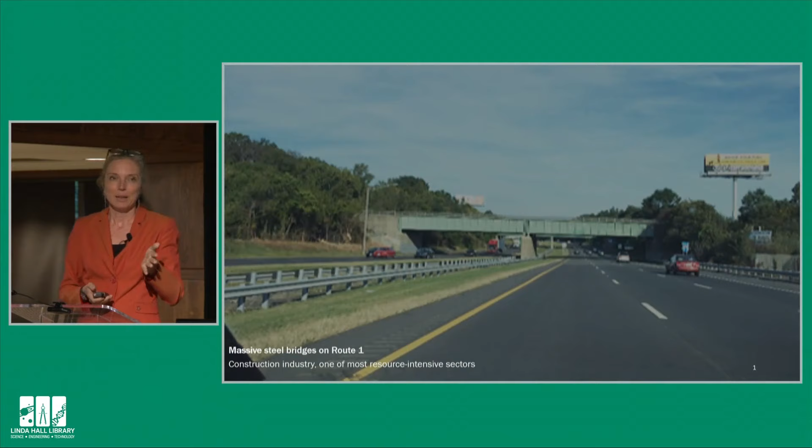Okay, let me figure this out, they explained this to me. No, this one. Yeah, so I moved with my family about 15 years ago from Belgium to the United States, to New Jersey, because Princeton is in New Jersey. And we like to go on the weekend to the Jersey Shore.

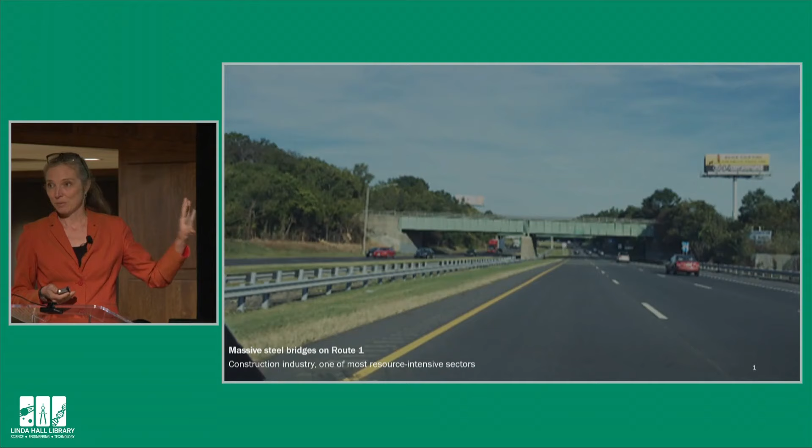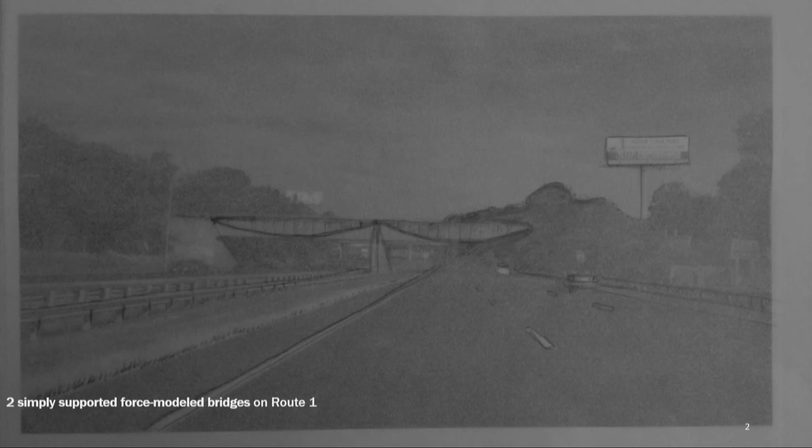When we drive on Highway 1, this is a picture I've taken, I am always kind of surprised to see these kinds of bridges. They are very massive, there is a lot of material in there, and the construction industry is one of the most resource-intensive industries. If there are any mechanical, civil, or structural engineers amongst you, you know that if you actually model that bridge as just two simply supported beams, these are really the shapes that these bridges should have. If you do that, you save about 30% of materials, which is great for the economy, for the client, but it's also great for the environment.

650,000 homes were destroyed, and of course there was also a lot of human loss. And we know that these hurricanes are going to be more frequent and more intense.

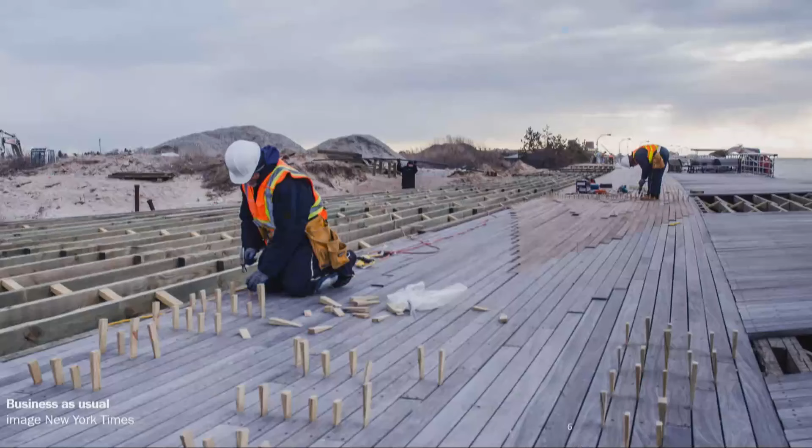As a civil engineer, I was very shocked when I was afterwards seeing images like this, where basically all these coastal communities were in a hurry to get their boardwalks back up exactly in the same way as it was before. And of course, this is a disaster waiting to happen again.

Yes, it might, but also, you cannot actually go on the beach anymore. Your real estate property goes down, and animals cannot really move between the land and the water anymore. So I don't think this is a really good solution either.

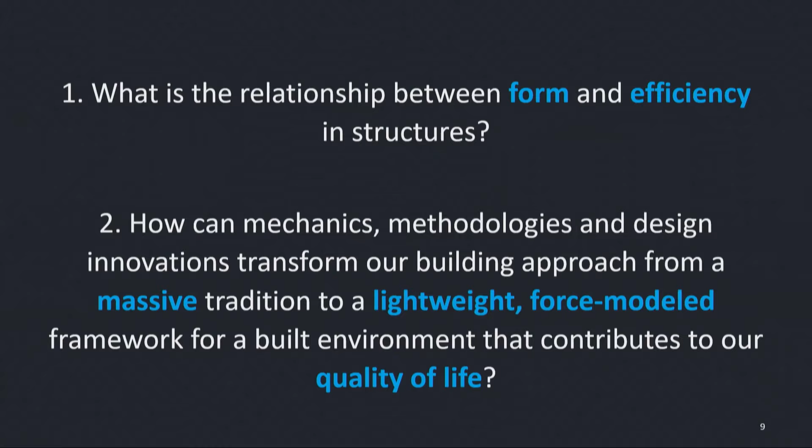So in my research, I look at what is the relationship between form and efficiency in structures. We develop methods, and we use mechanics and design to transform the engineering design framework from thinking about just using a lot of materials and mass to a more lightweight, force-modeled framework, and hopefully this will contribute to our quality of life.

I am not the first one to think about using form, because my lab is called the Form Finding Lab, using forms rather than mass to span large systems.

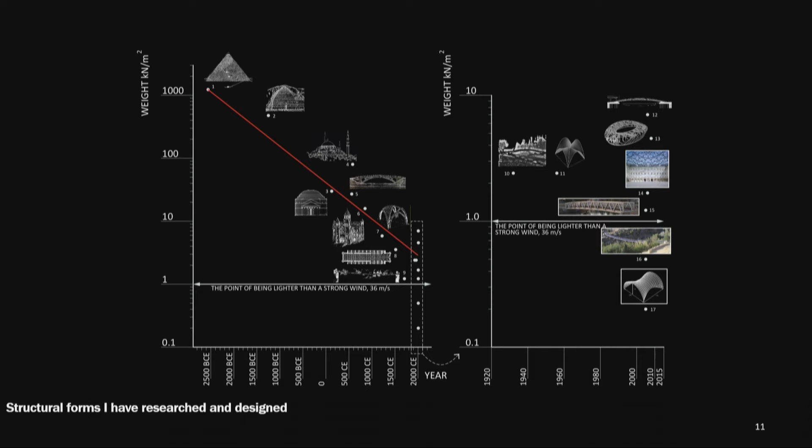But I'm not the first one who thinks using form rather than mass is a good idea. And this is really necessary because our world is facing, especially in the construction industry, some acute challenges. The first one is, of course, climate change.

Oh, okay. What does that mean? I just keep on going? Okay, keep on going. All right.

So climate change—the construction industry is responsible for 30% of CO2 emissions. I was just talking about that with somebody here in the audience. So in China, in 2017, they imposed a 4-month construction ban—no more cement being made—because it was just too much pollution.

I don't know if you know this, but for example, if you use concrete, one of the ingredients of concrete is sand, which is a non-renewable resource. Today, we use about 10 billion tons of concrete a year. In 2060, it will be 60 billion tons of concrete. We actually don't have enough sand to make all that concrete, right? So we're depleting completely non-renewable resources.

And then finally, when we make things—buildings and bridges—we produce, in the US, 29% of the landfill actually coming from a construction site.

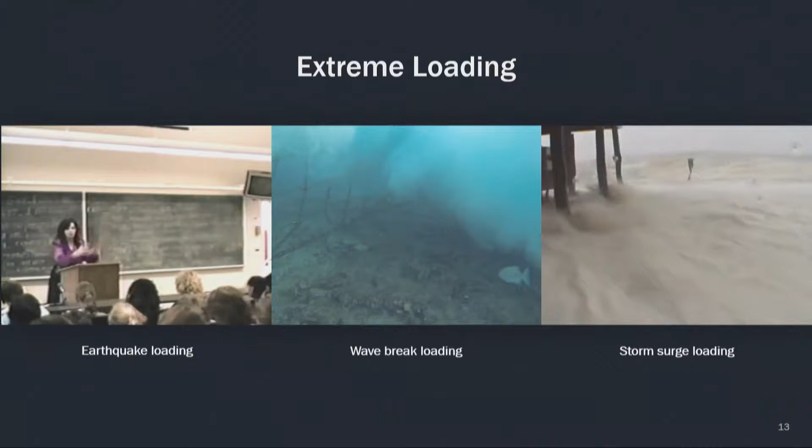And then we are dealing with extreme loading. Some of these loads have always been there, like earthquakes and things like that, but some are becoming more like storm surge loading. These storms are going to be more frequent and more intense, and so these extreme loads don't occur very often, but when they occur, they really peak in their loading conditions.

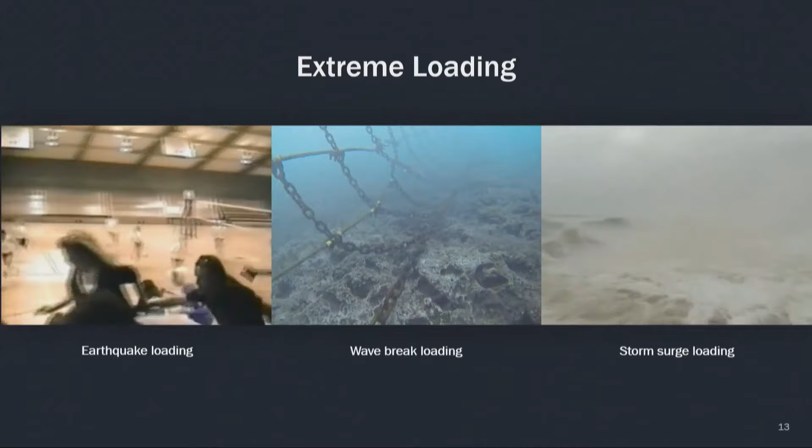And then there are some challenges of all times. The first one is the realm I work in: scale. You have all kinds of different engineering—you can design iPhones quite small. But if you're in civil or structural engineering, you design things in the range of 10 to 100 meters, or maybe 1 kilometer or 10 kilometers.

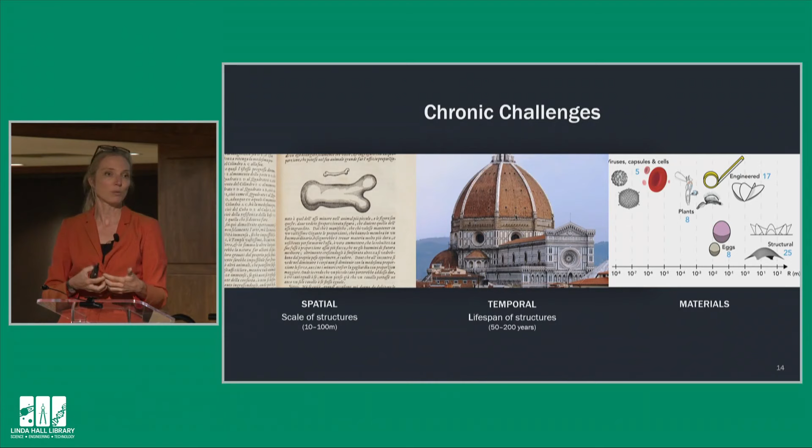So we work at a very large scale, in terms of space, but also in terms of time. We want the things that we design and build to last more than 2 years or 5 years. We design them for 50 years, 100 years, but sometimes they last 400 years or 2,000 years. So that's also a challenge.

And also in terms of materials, we do not have such a wide palette of materials available. And I was very happy today when Eric showed me one of their newest acquisitions here in the library is a book by Galileo Galilei. Actually, he's one of my heroes because he described that you cannot just take something that works at the small scale and then scale it up. That is because area scales to the power 2, but volume scales to the power 3.

And so if you take a bone of an animal and you think, oh, I'll just make that structure a little bit bigger, actually that bone would look like that. So you can't just take something small and make it bigger. It doesn't work in terms of scale.

I'm going to come back to this. This one is one of my favorite structures. This is the dome in Florence. And I'm showing it here because, of course, this dome has to carry its own weight, but also already for 600 years, it has been resisting seismic loads, right? So we have to design our structures for a long time.

And then also, in terms of materials, I mentioned this, as you will see today, I'm a lot inspired by nature, but nature has a very wide palette of materials available. In buildings and bridges, we don't have such a wide palette available. So that's another challenge. So I think we need to change what we design, how we design, and how we build it.

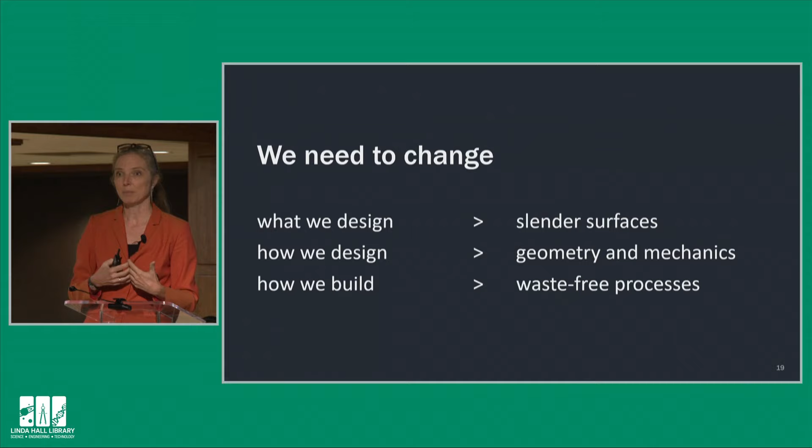And so my idea is to use slender surfaces. So you will see my talk. I will talk about shells, rigid shells, flexible shells, membrane structures. I think we should use geometry and mechanics. This is actually very complicated because we are working here with nonlinear behavior. We're working with large strains, large displacements.

And then also, I think we should build using waste-free processes. We want to get rid of that 29% of construction waste in the landfill. And actually, the National Academy of Engineering states this as one of the big challenges, right? That we should try to build more carefully and maybe draw inspiration from computer science, and I'm going to talk about that.

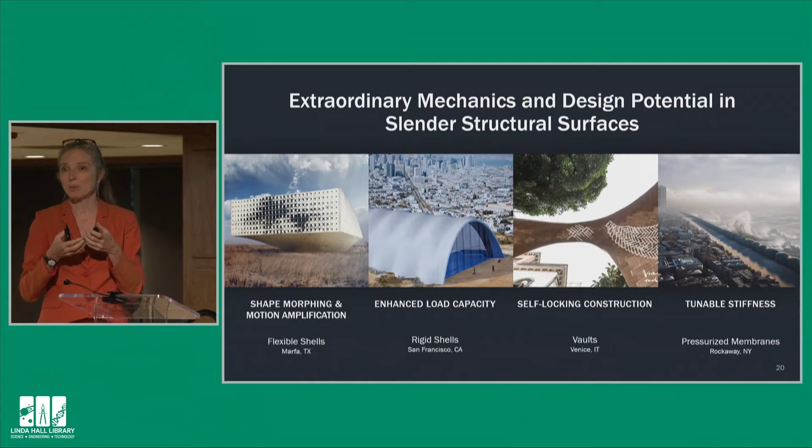So my proposal is to leverage the extraordinary mechanics of these, what I call slender surfaces, very thin surfaces that have one dimension that's much thinner than all the other dimensions, and these kinds of surfaces behave amazingly because they are what we call indeterminate. They spread their forces throughout the surface. So if there's somewhere a hole, the loads can find a path somewhere else. They have properties that normal structures like beam and column structures don't really have. And they behave non-linearly, even if their materials are behaving linearly.

And so I'm going to show you examples of how we can use flexible shells that change their shape, how through folds and corrugations we can actually give an object a higher load-bearing capacity. I'm going to show you a process for how you can build without creating waste. And I'm also going to come back to the storm surge barriers and talk about how we can tune their stiffness.

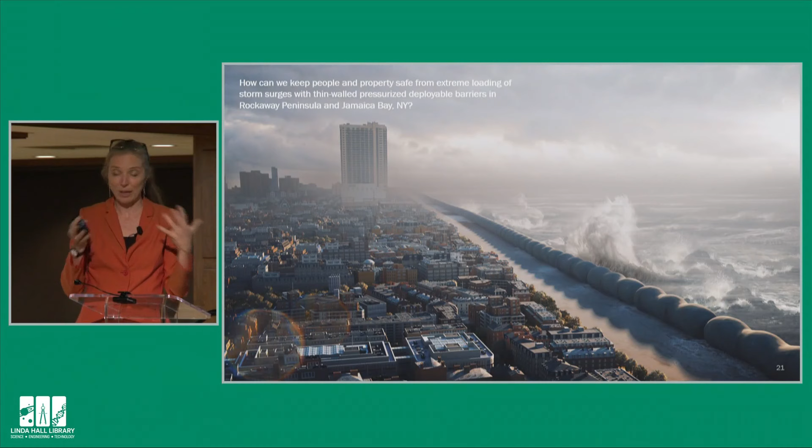So this is my proposal, and I'm going to talk about this last, which is absolutely relevant today when we're talking about Hurricane Helene. So instead of building these kinds of permanent concrete or stone walls, I'm proposing an inflatable membrane that can be filled with water and that is going to resist extreme loading. This is a rendering, by the way. This is not a real picture.

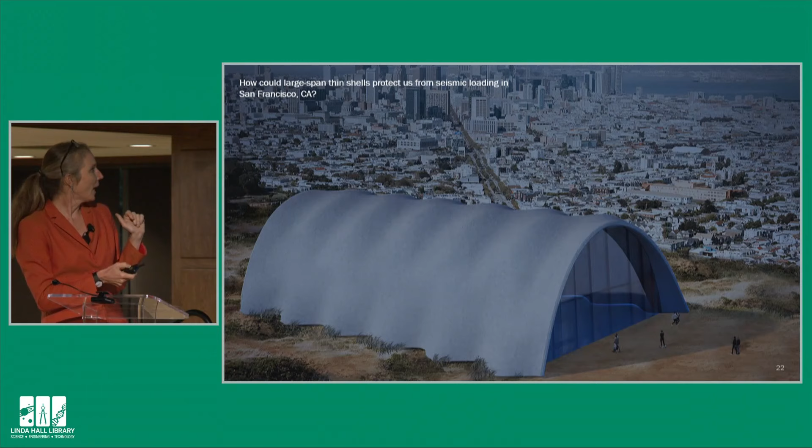I'm going to talk about how can we shape shells for large span systems so they can keep people safe from seismic events? How can we construct efficiently without creating waste? And I'm going to start with this one: how can we design buildings that keep us comfortable while also reducing energy consumption? And this, again, this is a rendering for an imaginary museum in Marfa, Texas.

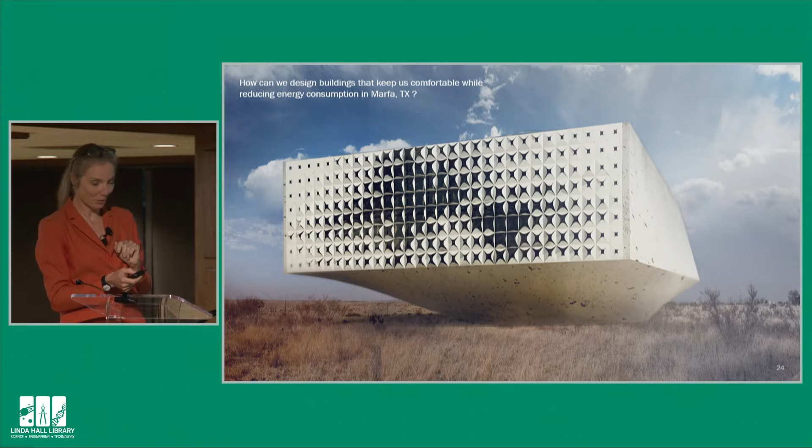So I'm going to start with this one here. So I'm interested in what they call adaptive facades. So these are facades that can adjust their aperture to lighting conditions or heating conditions outside. This is not a new concept. For example, in Paris, in the Institut du Monde Arabe, they have these kinds of adaptive facade elements, but often they're rigid body motions. That means that they have rigid parts and hinges, and often they fail. If you go to the Institut du Monde Arabe, you actually see it doesn't move anymore.

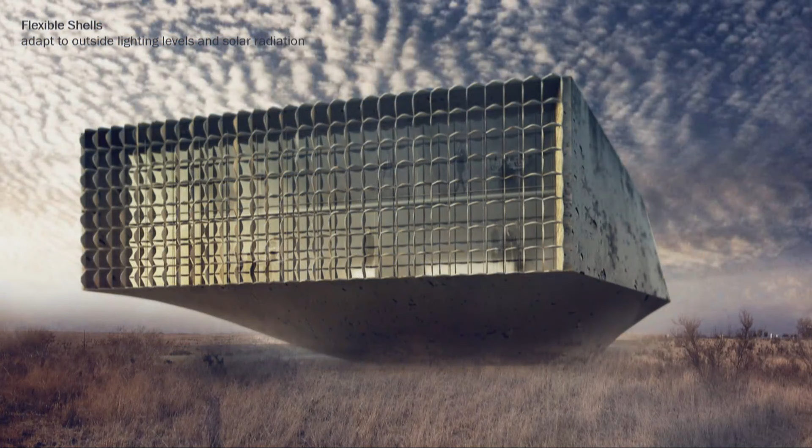It has been shown that for this same museum, maybe at twilight you want your facade to be completely open, but at noon, when there are high lighting levels, you want your facade to be closed. It has been shown that if you can make such an adaptive facade, you can save up to 40% of building energy that goes into lighting, heating, and cooling.

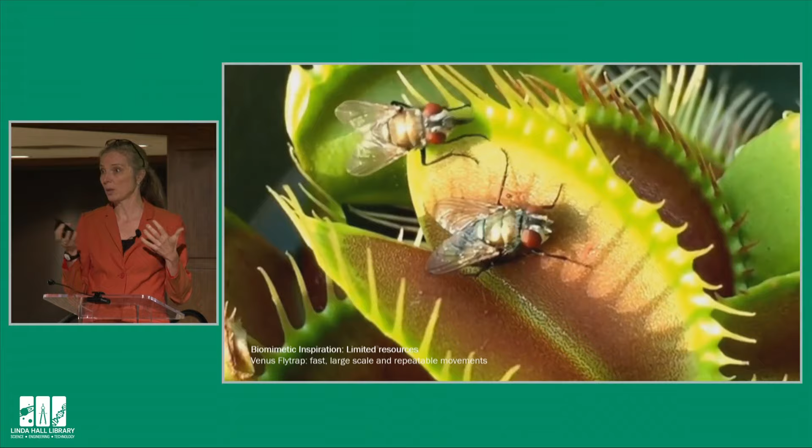So we started looking at plants for inspiration. Now, you might think that plants don't really move. If you think about a cactus, that doesn't really seem to move. But if you think about a sunflower or a Venus flytrap, that obviously move. Plants move to protect their organs, to catch prey, or to pollinate. So we're interested in seeing, is there something that we can learn from plants?

Because plants do not work with rigid parts and hinges, everything is kind of elastic and deforms. Is there something there that can cause repeatable movements that we can scale up to the facade level? So we worked with a biologist, Sasha Eisenham, and we identified in the plant world 5 different ways that plants move. The first one is differential expansion.

Basically, if you have 2 layers of cells, and in one layer the pressure gets higher, then this thing starts curving. The second one is torsional buckling.

This is the bird of paradise flower. It has a very slender element sticking out. If a bird sits on that, the flower twists, and it deposits seeds on the bird. Another way is using layered material anisotropies.

So basically, if you have 2 materials with a specific fiber orientation put together, and then you introduce humidity, these things will want to work against each other, and you can get all this warping.

Then there is release of elastic energy, mostly in the dissipation of seeds. But we were most interested in shell geometries and mechanics, because what we see there is things deforming elastically, mostly in bending, not in stretching. If you stretch something, that requires a lot of energy.

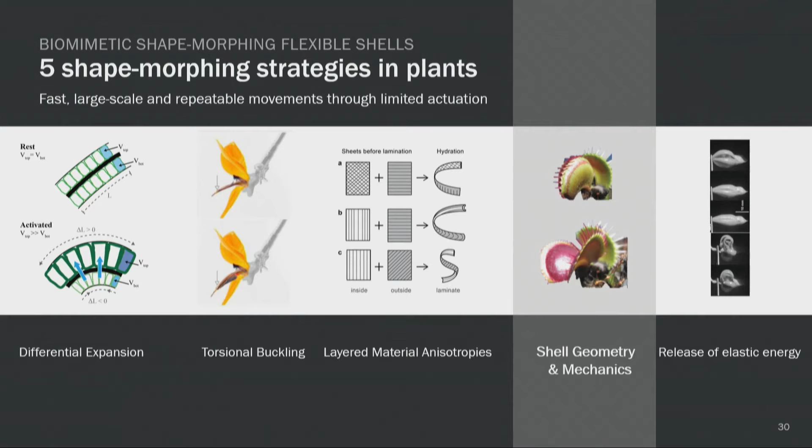Now, nature is very smart and very lazy. It doesn't want to dispense a lot of energy, and it doesn't want to create a lot of materials either. So nature is kind of a perfect teacher in that way.

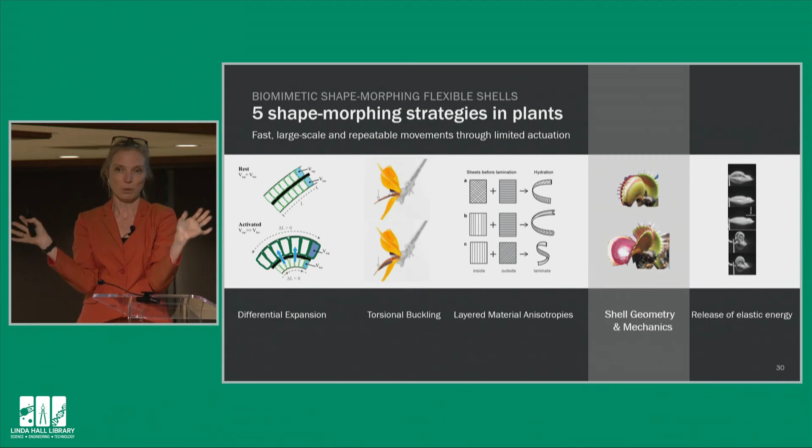So we were interested in those kinds of plants, but not the Venus flytrap, because if you imagine that on your facade, it would just be open, close, open, close. That would not be very pleasant to be in. But we found another flower, this one here, which actually grows in Australia, the Stylidium graminifolium, shown on the left-hand side.

It basically has this curved thing, and you see on the left-hand side the red bend, that is the active bend. If a bird comes and sits there, it kind of hits the bird and deposits seeds on it. So we were interested in the red part because that causes a great movement.

That red part is what you see in the middle, actually the same geometry as if you cut a Coke bottle open and split it. If you move that a little bit, it opens a lot. We call that dynamic amplification. We just actuate it a little bit and get very large movement.

So we were thinking, can we use that kind of anticlastic curvature for a shading device? You see our idea there on the right-hand side. The blue part is the active part. So if we squeeze that together or shear it, then that red part will open.

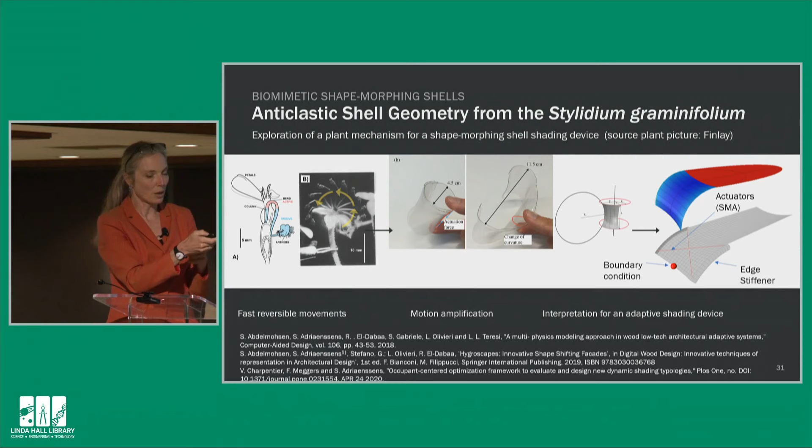And the way we were imagining this would work in real life is we would have shape memory alloys there that would contract, either both or just one, and that would cause this tongue to lift or otherwise twist.

And of course, we draw our inspiration from nature, but actually Lord Rayleigh had already said before that when the shell is thin enough and vibrating in one of the graver possible modes, the middle surface behaves as if it were inextensible, meaning no stretching, only bending.

So what we did is we carried out analysis to identify eigenmodes, and these eigenmodes show us how these shells will behave if we don't want them to stretch, but we want them to twist and rotate. We call these isometries.

So these are the kind of geometries we are interested in. We looked at what is the optimal ratio of both radii of curvature, and established that this blue part, the active part, could do all the movement we wanted to block out the sun.

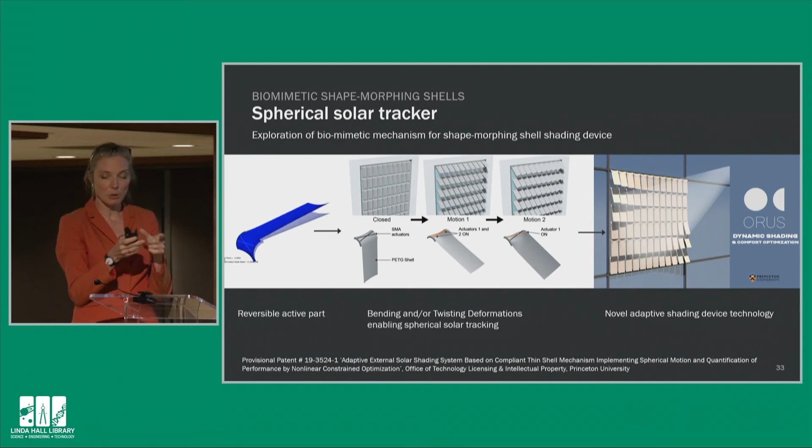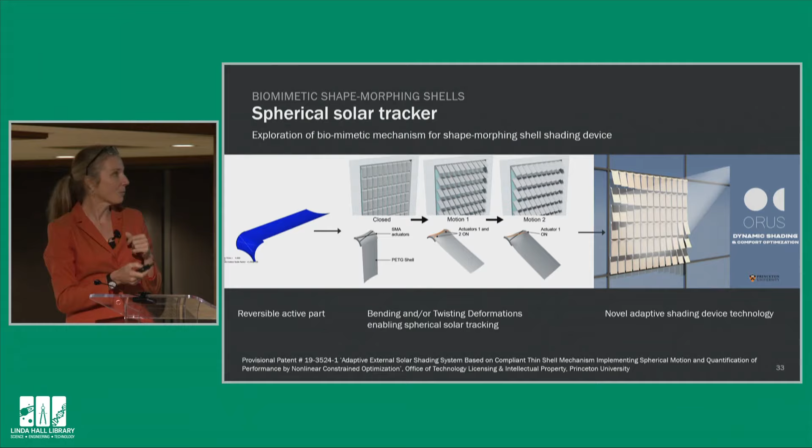With that geometry and the shape memory alloy actuators, we can have a facade that's closed, or we can bend it so it moves up, or we can shear it and it twists. So we can have a dynamic shading facade, and here is a rendering of what that would look like.

It's important when you design facades that people have a view outside, so this would allow a view outside. This is when it's fully open, this is when it's half open, and this is what it looks like when it's closed at nighttime.

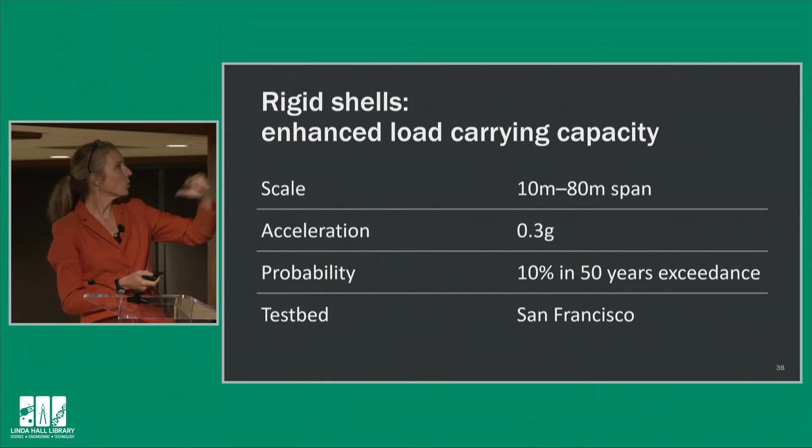So those are flexible shells. I'm now going to move to rigid shells - things that don't really deform that much. The scale is 10 to 80 meters, and I'm looking for things that might be useful for California.

Where many earthquakes happen, if you search on Google you will see that many shells survive extreme events. We have some examples here. Actually the bottom middle one is in Florida - all the houses around it are gone, but that dome still stands.

Also here, this is after a tornado. And then there is one after a fire, and one after an earthquake. So shells seem to be very resilient under these kinds of extreme events.

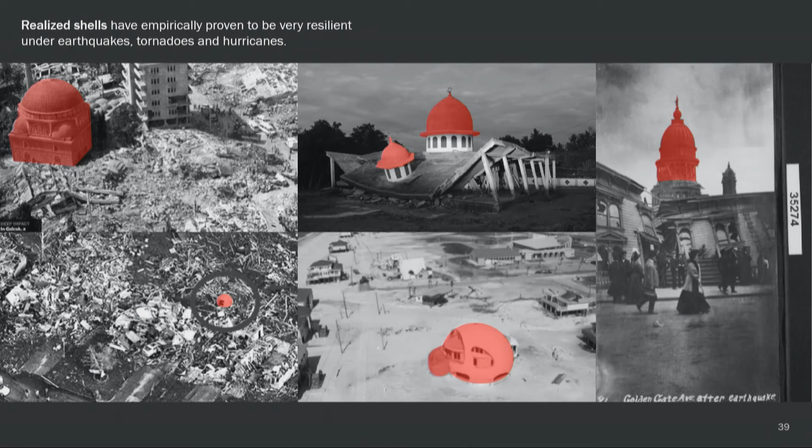We wanted to check out why that is. So we started studying this beautiful church in Mexico City, which survived the 1985 earthquake, which was 8 on the Richter scale. We wanted to find out why this beautiful curved structure had not collapsed during the earthquake.

So we carried out dynamic structural analysis to determine how this thing behaves when an earthquake hits. First we studied the stresses to make sure it didn't break - there was no overloading. But the other thing we identified is that it vibrates at a very high eigenfrequency.

That means if you disturb it a little bit, it will start vibrating at a certain frequency. For this kind of shell it is actually very high - it's 3.09 hertz. You probably don't know, but for example in a building like this, the eigenfrequency would be around 0.5 or 1.

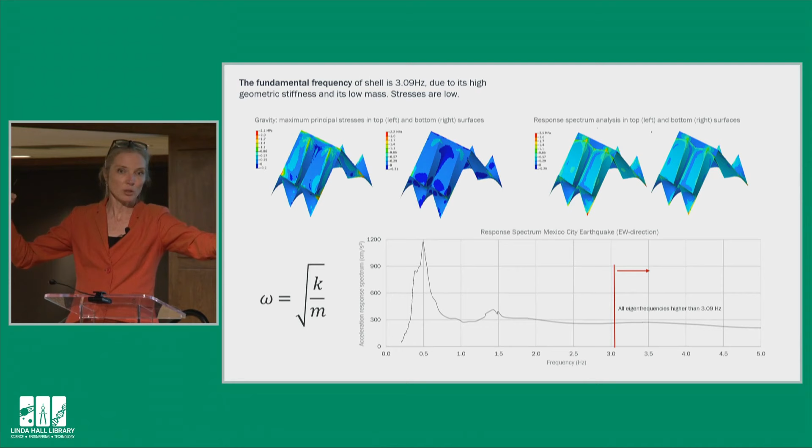So it has very high eigenfrequency. This is very different from the peak eigenfrequency from the Mexico earthquake, plotted there in black - that's for the earth. The earthquake likes to vibrate at 0.5 hertz, whereas the church wants to vibrate at 3.09 hertz. These two frequencies are very far apart, so they do not overlap. If you have frequencies that overlap, they make each other worse, and you get a lot more damage.

For example, this happened in 2000 in the UK - they opened the beautiful Millennium Bridge. Everybody walked on the bridge and started stepping in the same rhythm as the bridge liked to vibrate. This is extremely dangerous, because if you have the two together it causes enormous stresses. So anyway, what we're seeing here, this is not going to happen.

The frequency of the shell is much higher than the frequency of the earthquake, and that is because of this formula for eigenfrequency - it is the square root of stiffness divided by mass. The mass of that church is very small because it's very thin. The stiffness is geometric stiffness - because it is curved, it is very stiff. If something is flat, it's not very stiff.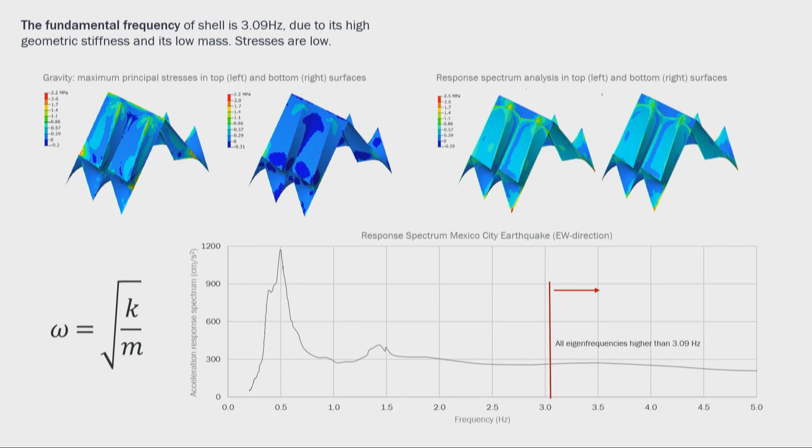If you take a piece of paper and let it hang, it will just flop down. If you curve it, like a pizza slice curved a little, it will not flop down. So if you curve something, it has enormous stiffness, and that is the reason why these shells behave so well under earthquake loading. So we study how we can find shapes for these.

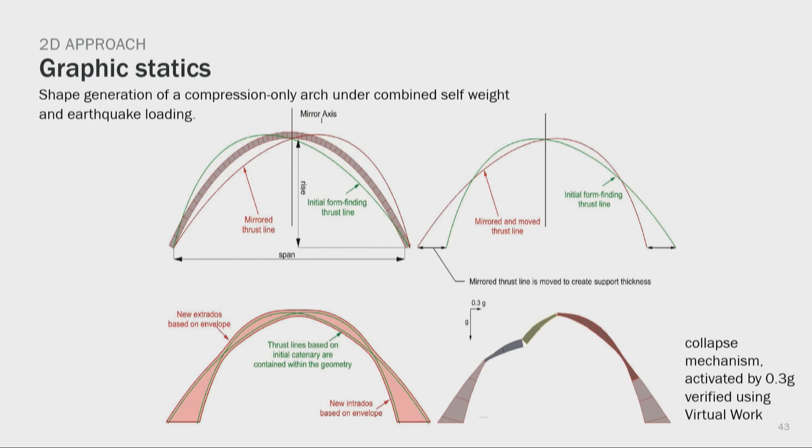We then test that, whether an arch that looks like this would indeed resist an earthquake very well. We test it using virtual work, and indeed it can resist an earthquake very well. Now you might say, I've never seen an arch like this, or I have no idea how you would build that. That's true, but we have 3D printing. So these kinds of shapes are now completely possible. They were not possible when I was a student, but now they're completely possible.

Okay, maybe we don't want to build arches, but actually maybe we want to build a gym, or a congregation area. So instead of taking the envelope, we can offset the second curve and then loft the surface through it, and we end up with a geometry like the one you see on the right-hand side. You might say, I've never seen anything like that either.

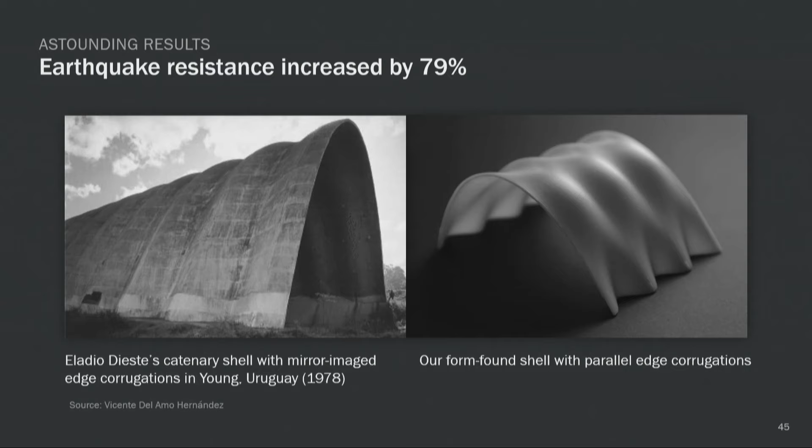Actually, it already exists. In 1978, Eladio Dieste, an amazing engineer from Uruguay, built these corrugated shells, very thin shells, to store grain. So not an iconic structure, just a very utilitarian structure. Our structure looks a little bit like that, except with us the corrugations are offset. With Eladio Dieste, they go all the way across, but with us they're slightly offset — our corrugations don't run over the entire thing.

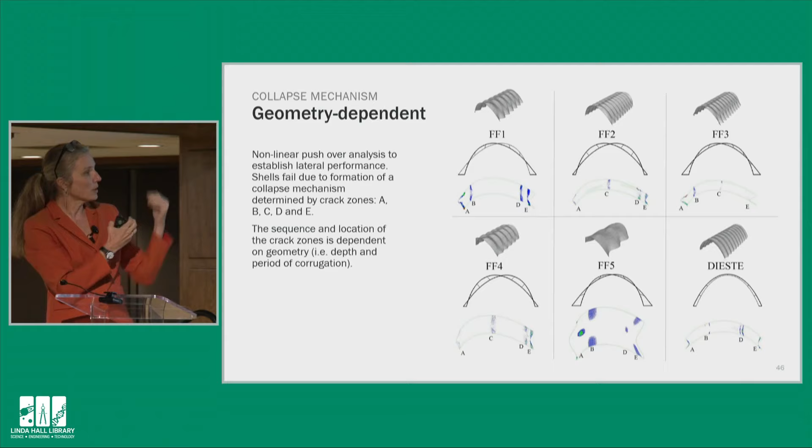So then we carried out what we call nonlinear pushover analysis. We push these geometries, not until the first crack occurs, but until we get a failure mechanism with 4 hinges. We produce many different variations of this, and we also test the Dieste shell, which you see at the bottom right. When these shells are subjected to horizontal load, eventually they fail. There are always 4 hinges — there's a hinge here, a hinge here, a hinge here, a hinge here, and we get that failure mode. But also what you see is that they fail differently.

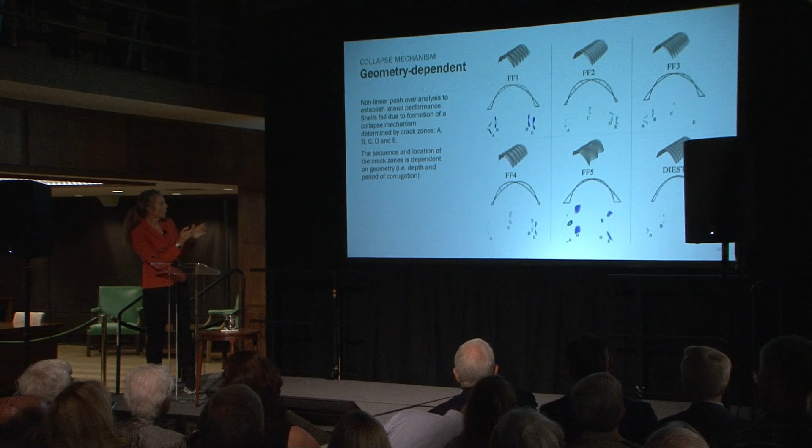So sometimes you have A, B, and D, E, like also here and here. But sometimes you have a hinge here at the top, and it seems the failure mechanism is different. So this one here, the one with the C, and also this one here — these are all the ones that have a corrugation depth that's not very deep.

So why do these hinges form? That is because these hinges form in the areas where we have not curvature in two directions, but curvature in one direction. If you have single curvature, something is not so stiff, that will attract all the forces and it will break there first. So these are all the areas where we have single curvature, and that's where the hinges are occurring.

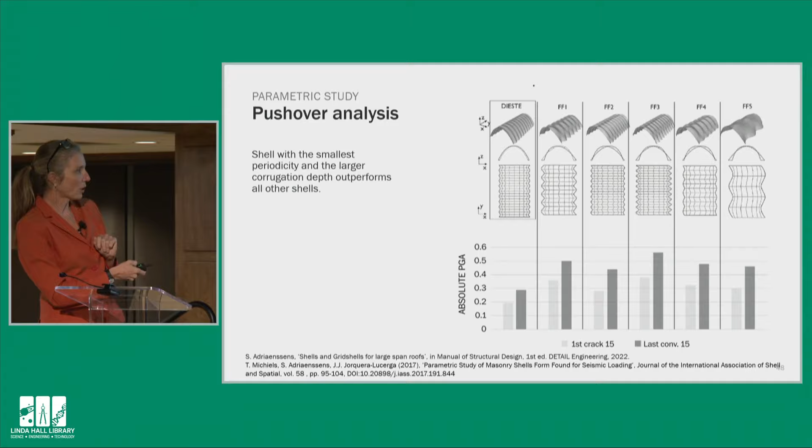And then if we study these different shells, we have the Dieste shell here. So how does that behave? Well, the first crack in the Dieste shell occurs at 0.2 G, but a good earthquake is 0.3 G. So indeed, at 0.3 G, this shell, which is in Uruguay, is going to develop 4 hinges and will basically collapse. All the other ones outperform the first one.

So everything is the same — span the same, height the same, same amount of material. The only thing that is different are the corrugations, so we're just using form, not more material, to generate all these different shells. And what we see is that this one is really the best one, right? The first crack will start appearing at 0.35 G, and then it really collapses at 0.57 G.

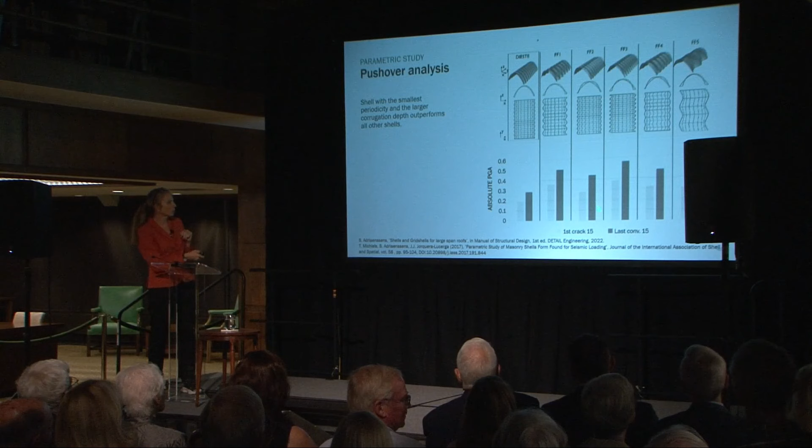So this performance is much better than this performance here. Same span, same height, same amount of material — the only thing we're doing is we're playing with form. We're changing the corrugations, and because of that, we can actually give it a much better or much higher capacity.

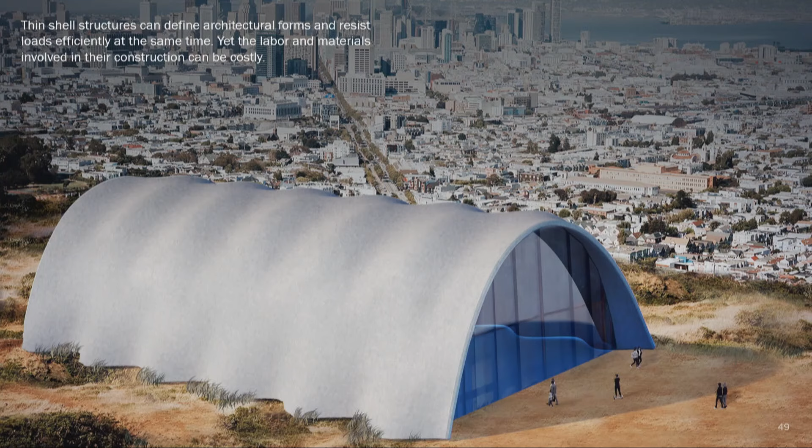So here is a rendering of what this would look like actually in San Francisco. Now, people don't actually build shells anymore. Actually, they do build them as tornado shelters in the Midwest, but often people don't build them anymore because they're expensive to build.

And why is that? Because this is a picture of one of the Felix Candela shells in Mexico. I don't remember exactly from what time this is, but it's from a time when materials were cheap, labor was cheap. This is not today's United States, right?

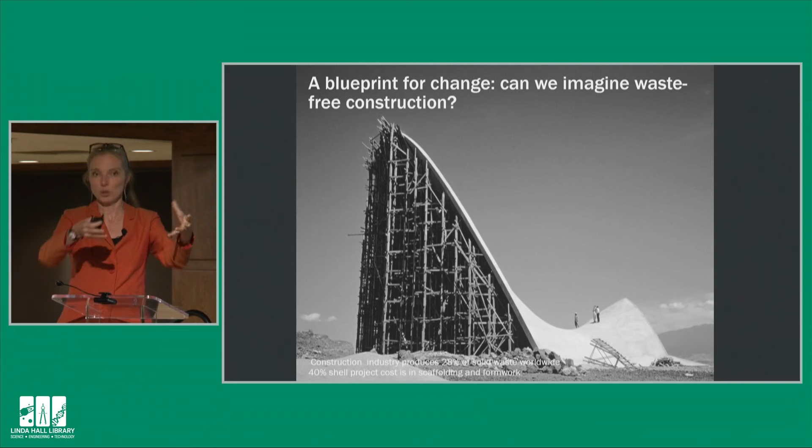What we see here is that in order to make this beautiful shell, you first have to build a wooden structure—also beautiful—but all that wood goes into the waste in the end. It's estimated that for these kinds of projects, 40% of the shell project goes into the scaffolding and formwork supporting it while it's being built, and once the concrete is cured, you take it away, and it often ends up in the landfill.

So I'm going to show you now how we can build vaults and shells without creating any waste, using equipment, humans, robots, and AR. And I'm coming back to one of my favorite structures.

This is the dome in Florence. It dates back to the 15th century. As you might know, it was designed and built by Filippo Brunelleschi, who was a watchmaker and who won a design competition. He claimed he could build this dome without using any scaffolding.

It's now calculated that if he had used scaffolding and supports, he would have had to cut down all the forests in Tuscany to make it. Of course, his clients didn't really believe him, so he did have scaffolding to get the masons and cranes up there, but the scaffolding was not supporting the dome while it was being constructed.

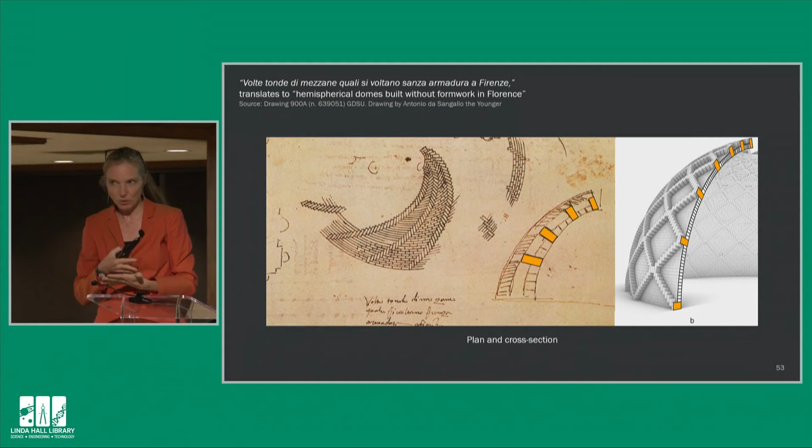So we were very intrigued, because he did not write down how he did this. He worked with a guild of masons—the Da Sangallo family, which was known for building these kinds of domes in northern Italy.

We have drawings like this one on the left-hand side, showing a plan view with radial bricks and some vertical bricks spiraling up. On the right-hand side you see a cross-section—it's actually a double dome. There's a dome on the inside, and yellow bricks connecting it to a dome on the outside. So basically, if you can build a dome on the inside, you can use that as scaffolding for the dome on the outside.

We're interested in the inside dome, which in Italy sometimes has single spiraling, and sometimes, as you see on the right, double spiraling going up. A lot of people think those are decorative, but they're absolutely not, because they're often covered with plaster and frescoes. So we started suspecting they must have something to do with how this dome could be constructed without supporting it during construction.

So we started looking at this. We assumed there was radial symmetry, that these domes were built layer by layer, like an igloo, and eventually as you curve inwards, that's where things would start collapsing. We also assumed that these bricks, colored here in gray, would have something to do with it.

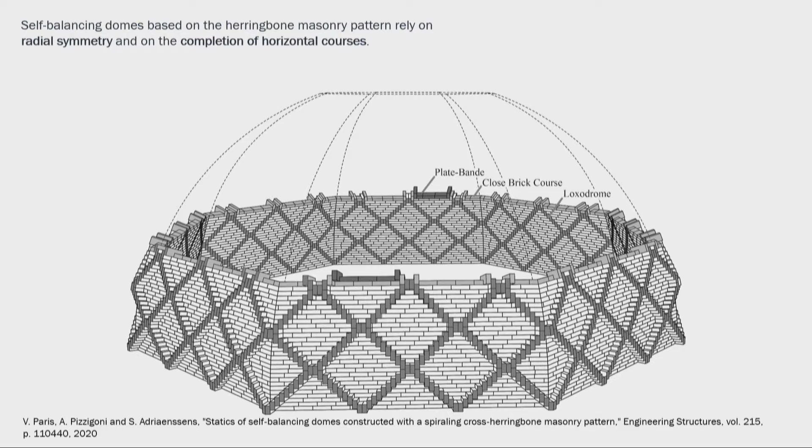Basically what happens is you start building your dome. To calculate this, we carry out discrete element analysis, modeling every single brick. We check one brick—what happens? We put another brick—what happens? This was a very long process we carried out.

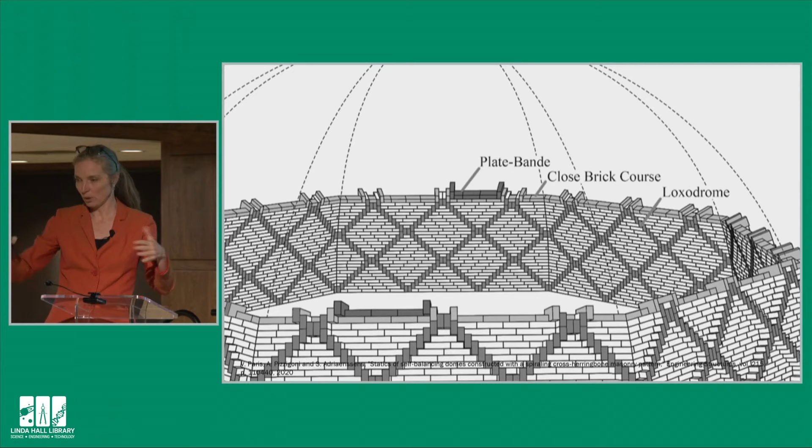But what we discovered is: as you're building your dome, initially it's fine, kind of like building a wall. But once you start curving inwards, these bricks really want to slide inwards. So basically what we discovered, what's key, is what happens here with these vertical bricks.

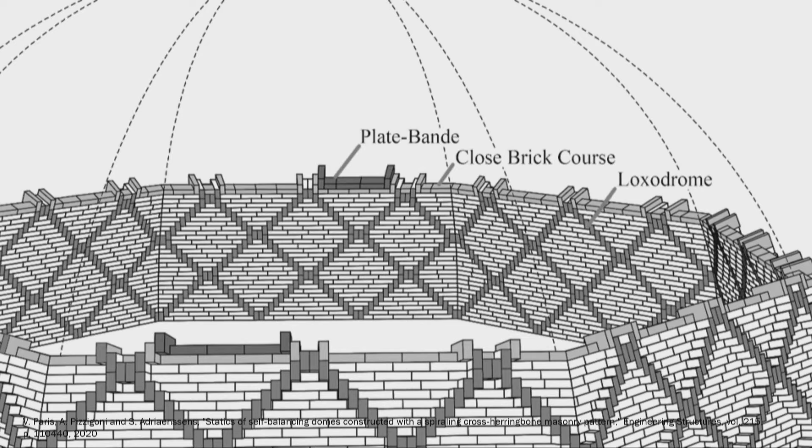These vertical bricks are stuck in the layer below, and they're a little bit like how I imagine book stands to be. If you have book stands and then bricks laying there, once the horizontal bricks want to slide inwards, they collide with the vertical bricks and jam against them, so they cannot slide inwards anymore. I'll show you on the next slide.

You see a still of some of the analysis we're doing. Here, what you see is the bricks sliding inwards, but that's because we assumed the bricks are coated with Teflon—they have a friction angle of zero.

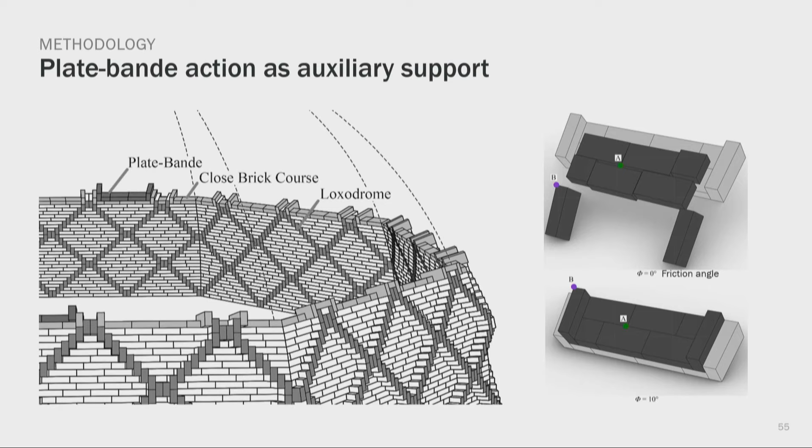If the bricks were Teflon coated, they would just fall inwards. But from the moment we have a little bit of friction, like the 10 degrees you see here, and in real masonry the friction between bricks is 15, 20, or 30 degrees, so much higher than this, these bricks jam against the vertical bricks and stay there. Then they press against these vertical bricks, which are stuck in the layer below, transferring the loads into that radial layer below, then through other vertical bricks downward, all the way. So these forces are transferred all the way down the dome. We checked sliding of bricks, falling in of different parts, and found that you can actually build curved surfaces like this.

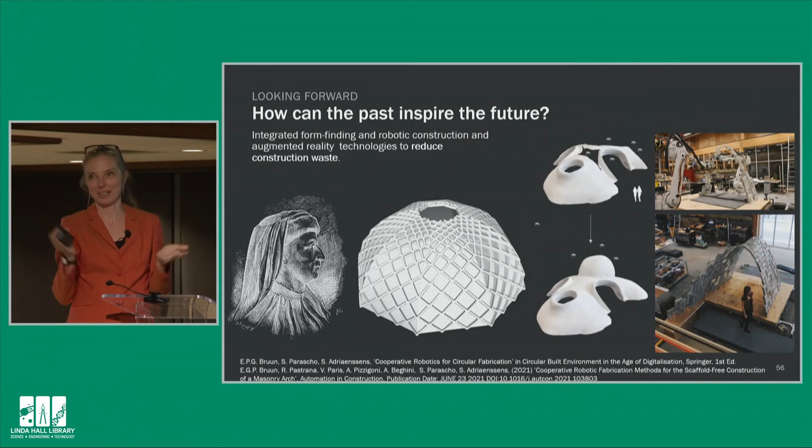So that's all very well. This is a picture of Filippo Brunelleschi. When we published about this, it actually got a lot of attention. If you publish about things from the past that people are interested in, that gets a lot of media attention. So we were in La Repubblica, in Smithsonian Magazine, everywhere. But that's all very nice - what do you do with that?

What do we learn from that for the future? We've discovered some algorithms on how we can construct without supports. I was thinking, could we use this with drones? Could we use robots? How could we do this?

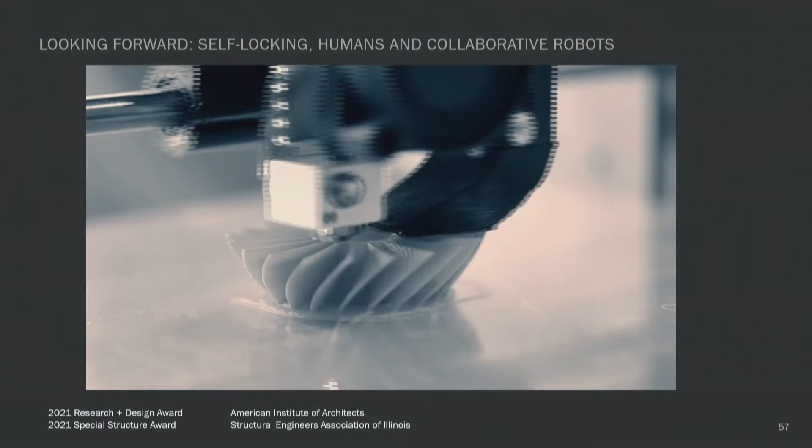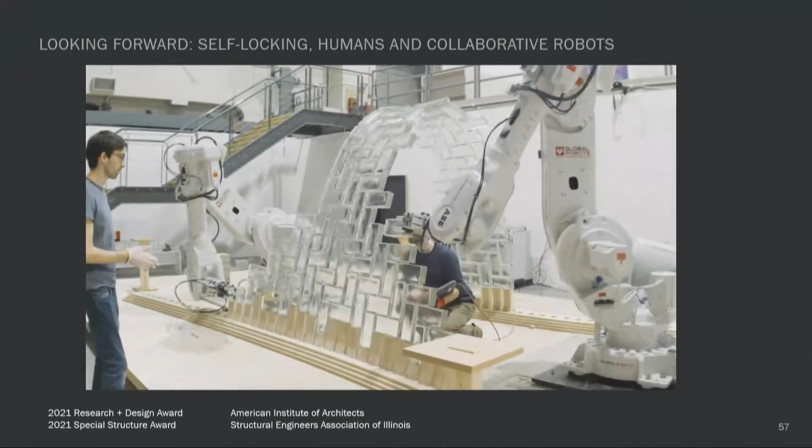I'm showing you here a video that SOM made, because we teamed up with them to make a vault for an exhibition made out of glass bricks. That's not so amazing, but it is made, as you see, with no support underneath it. So it's really humans working together with robots to build this system.

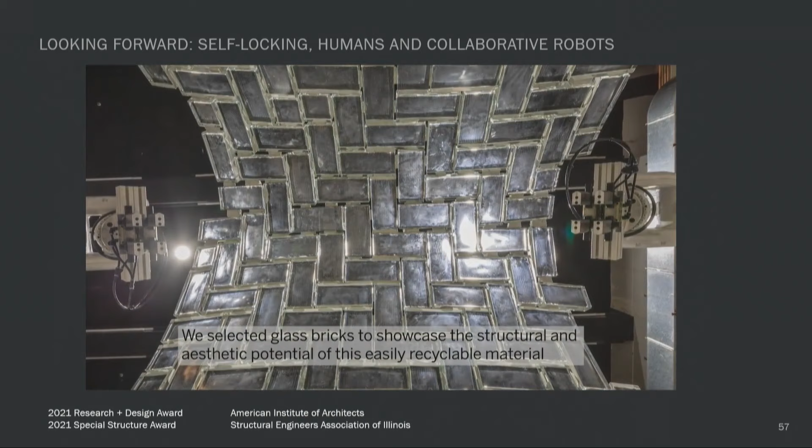You might recognize some of these amazing vaults that were built at the beginning of the 20th century. So the idea is to construct a central arch first and then build outward from there, again with no supports, only the robots positioning the bricks and holding them into place.

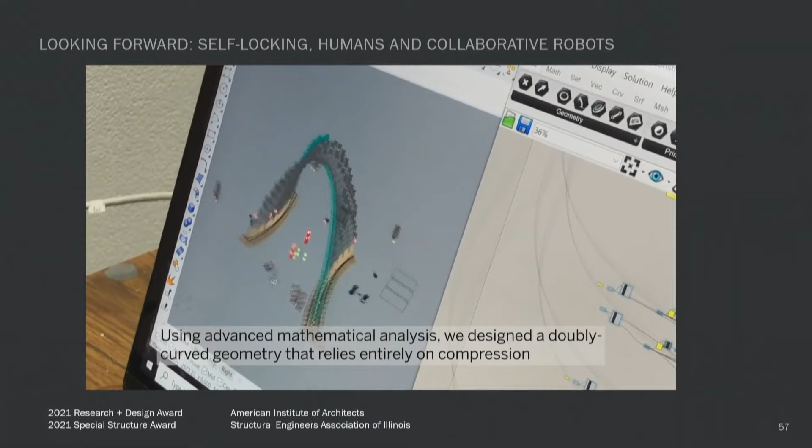So glass bricks have been used in design. Robots are really great to work with because, of course, they can do repeated manufacturing, but also they can hold the brick in position for a very long time while the epoxy is curing. And they can also support loads.

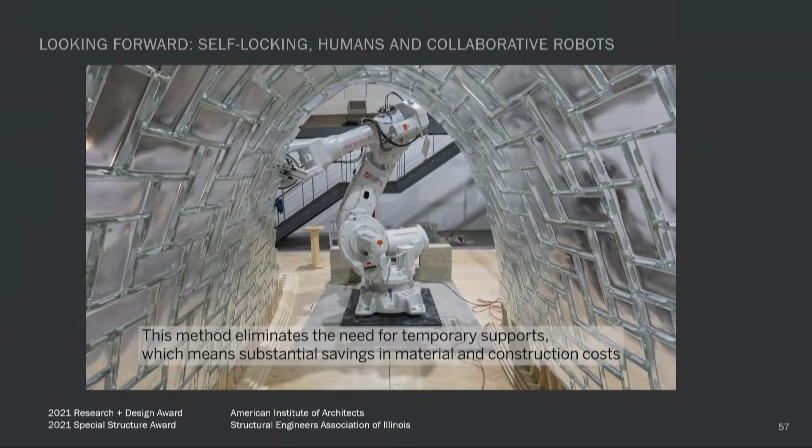This is my PhD student - actually just starting, I just started at Georgia Tech as an assistant professor. So we use epoxy. We also have wedges because, of course, the bricks are linear and the shape we are making, which is a compression-only shape, is curved. So we have to approximate this curved shape with these straight elements. Anyway, that was the beginning of an interesting adventure. It won some awards.

So in 2023, I was invited to present our work at the Venice Biennale. This is an event where architects, designers, and artists come together to present their work. We were inspired to do something with these algorithms we had found in these Italian domes, of constructing something without supports.

We had learned from the robotic construction that, while this is all great, the robots cannot really give us any feedback about how the epoxy is doing. They would just hold things in place, but couldn't really feel whether the brick was sinking down or not, because the epoxy is a material that deforms.

So we wanted to do something else, and we chose to do this in this garden here. This is the Palazzo Mora. In a palazzo, you can see it from the street - many receptions are held there, and it's also very visible from the terrace. So we wanted to work within the restrictions of this garden.

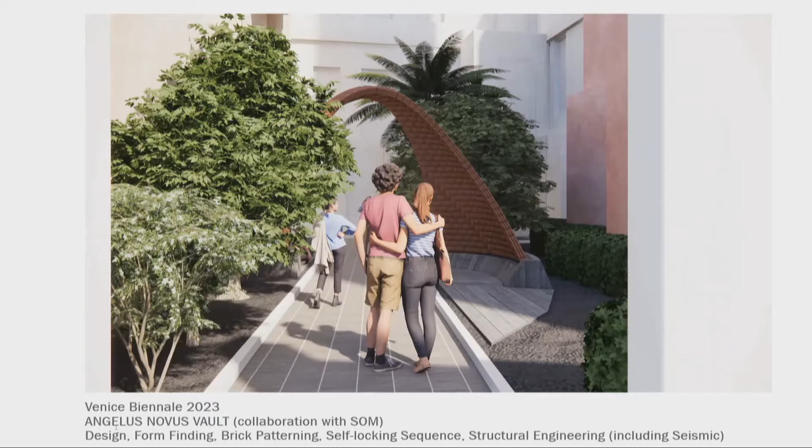This is a rendering that SOM made of a complete compression shape that would be constructed without supports, using that kind of herringbone pattern.

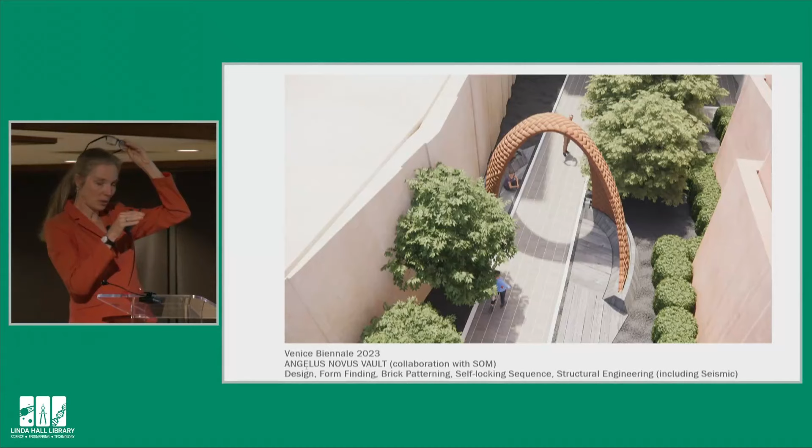And we had very little time to do this. SOM did the design, we optimized the form finding, we did the brick patterning, we determined the sequence of which brick should go where, and we did the structural analysis. This is in Venice, so we also had to make sure it wouldn't collapse under an earthquake.

And of course, as you can see, this is a very complicated shape. This is very difficult if you work with masons - if you build a wall, you can say, okay, according to this line, so high, so many courses.

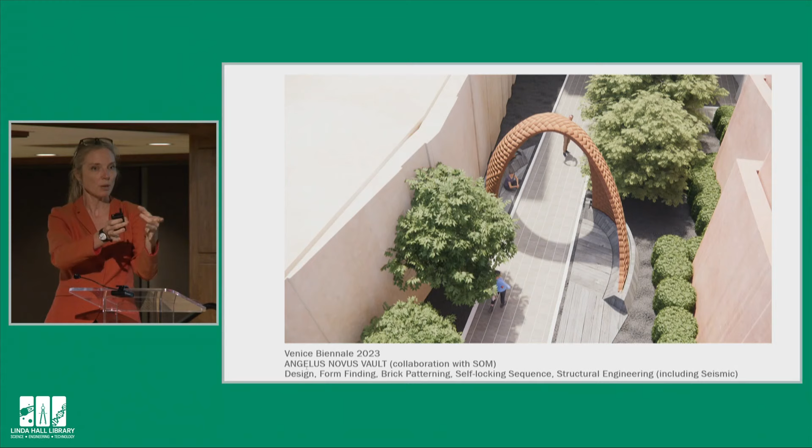A geometry like this is very difficult to describe, since every brick is rotated differently. So how are we going to do that? Traditionally, people have used X, Y, Z coordinates. If you look at architectural drawings, like the one on the left, people describe the position of all these points in terms of X, Y, Z coordinates.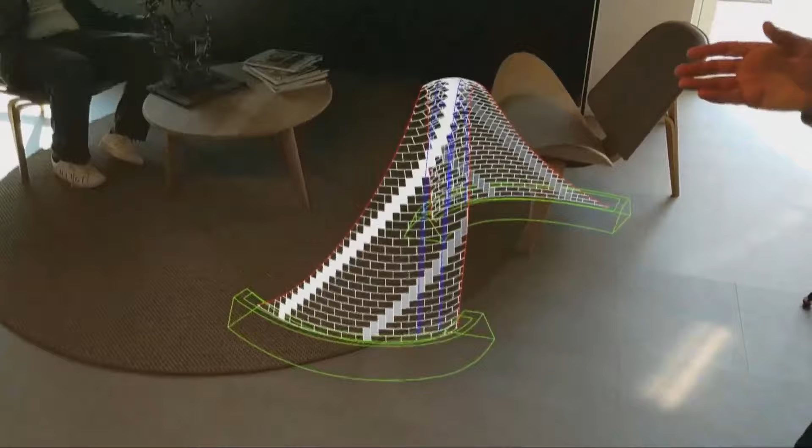So we adopted a new technology: augmented reality. These are goggles you put on your head, or, if some of you play Pokemon Go, you hold your phone up and see reality with a little creature appearing. That creature isn't really there, it's imposed on the real world.

What you see here is our design floating in space at the office of the Italian contractor, as they discuss how this thing could be built. It's wonderful because the contractor and the mason can see the structure beforehand, identify what's going to be difficult, and plan the construction process, since we can switch layers on and off to determine the sequence.

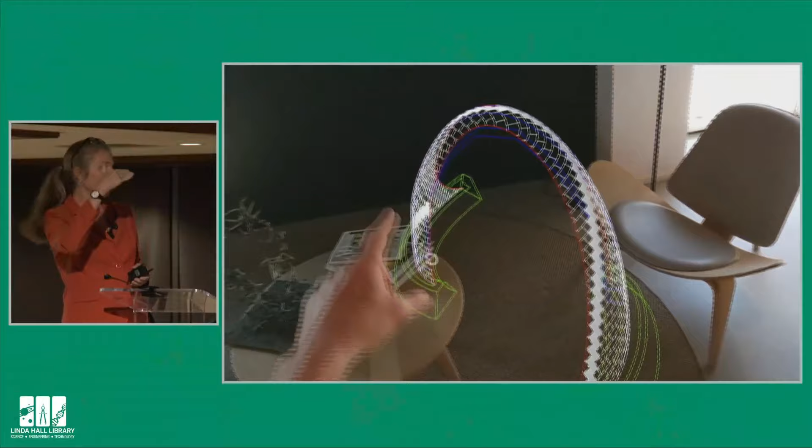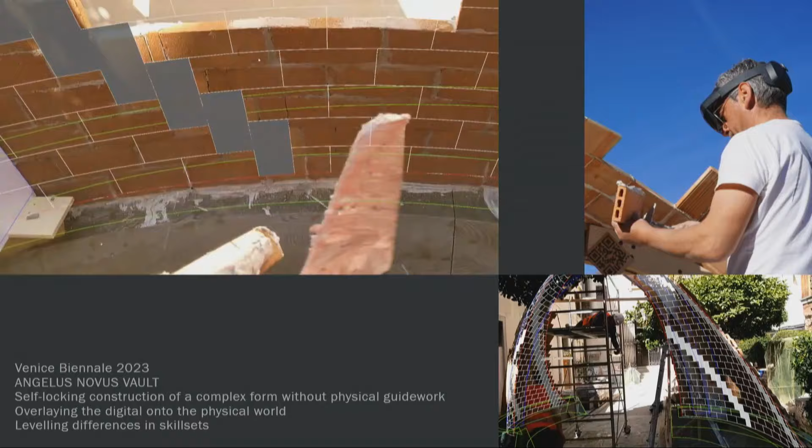Here it's floating in space, but of course we don't want it floating in space on the site. So what you're seeing and hearing now is us looking through the mason's goggles. We've scaled this up to fit within the garden, and the mason sees exactly where these bricks need to go.

I have a lot of videos with Italian swearing, but I chose one without any. What you see is our digital model, and then the mason approximating that model. On the right-hand side, you see we're not cheating—there's scaffolding to bring the mason all the way to the top.

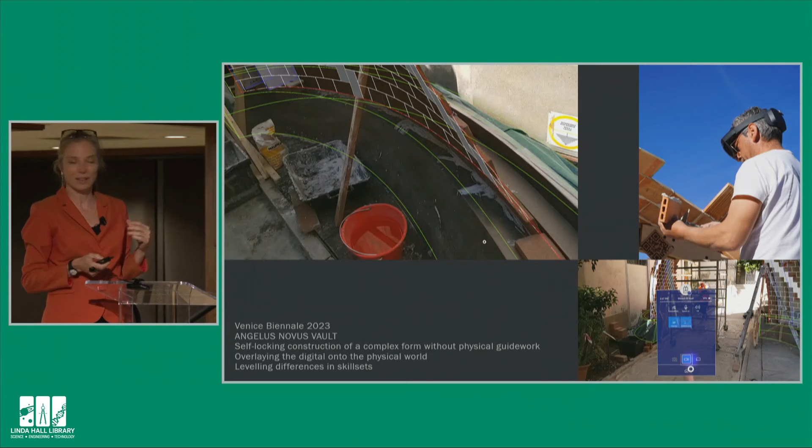It was interesting because we were curious whether the masons would adopt this kind of technology, since masonry is a very traditional craft and here we come with goggles and such. But it turned out the master mason liked gaming and had already worn that kind of device a lot. So for him it was interesting to bring new technology he already knew well into his profession, and it really empowered him.

So this is the final thing—this is my sister, and this is the final construction. It was lovely when I was in Venice; I overheard people saying it has a really lovely kind of craftsmanship to it. You feel it's done by humans, but it is a very complex form.

Here are those vertical bricks, the same pattern you saw in the Dome of Florence, which we used to construct without needing support. Here's a view from above, showing that lovely craft feeling. It won the Innovation Award, so we were very happy with that as well.

Okay, I'm going to come back now to the start of my lecture, where I talked about storm surge barriers. I feel tonight that's particularly relevant with Hurricane Helene coming up.

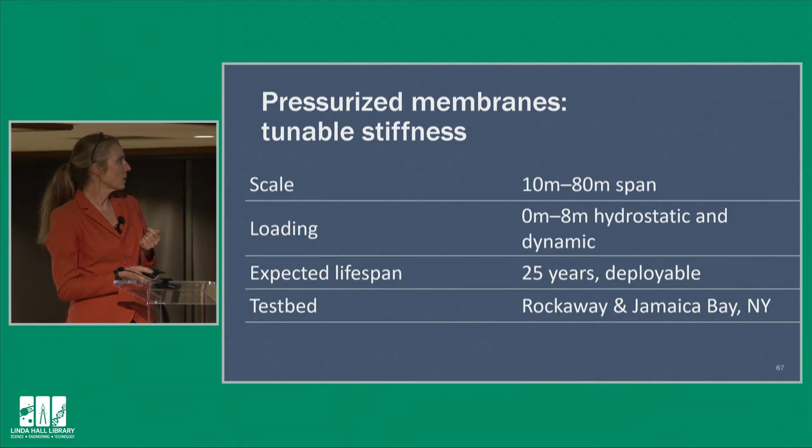We've seen this typical way of protecting the coast—you can do a boardwalk, a stone wall, or put lots of rocks and hope they protect you from storm surges when they come. But as I mentioned before, I don't think using a lot of material to make a big physical barrier between these two landscapes is really a good idea.

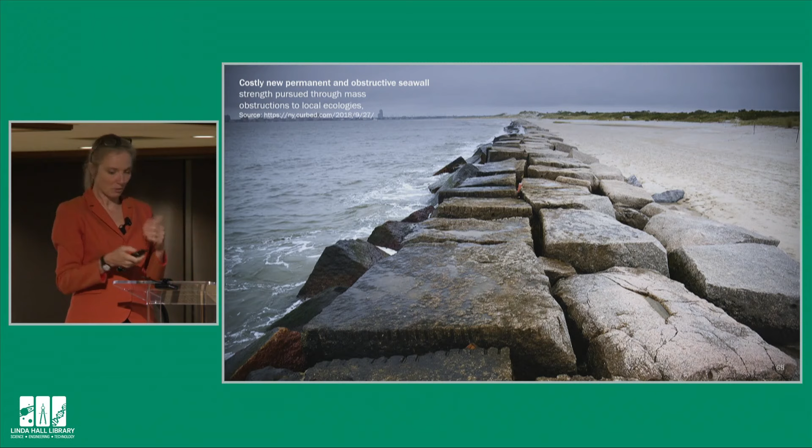My idea is to use a big inflatable membrane hidden below the boardwalk. When the storm surge warning comes, this membrane would be inflated, and it would hopefully resist the storm surge.

Inflatables have been used to shield off water, but in more static conditions in rivers and things like this. What is new here is the scale. We're looking at really complicated loading. Storm surge loading is both static, the water rises, that's one thing. Then you have breaking waves coming onto it, and also dynamic hydrodynamic loading, waves hitting the barrier on and off, and that varies spatially. So it's very complicated.

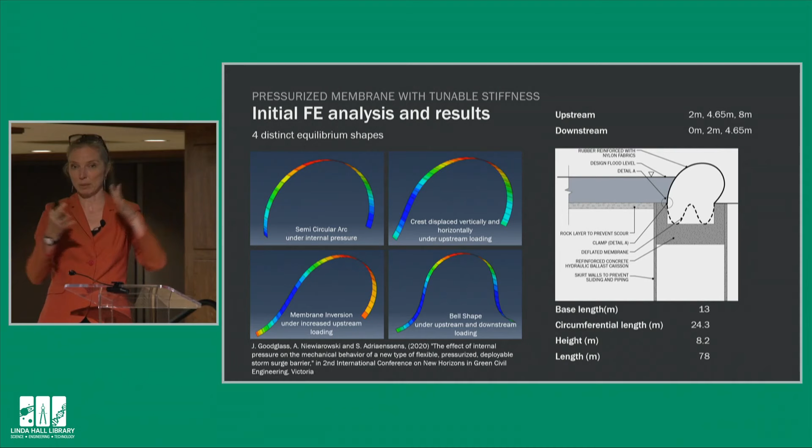Well, the loading is challenging. There's all this complicated loading that varies with time, is very high, and varies spatially. The structure itself is also very complicated because it's rubber, which is a hyperelastic material. That's very complicated. And then this thing has to stay stretched all the time. It's a bit like a balloon, it cannot be indented, because then it starts wrinkling and loses its structural function.

What you see here on the left-hand side is preliminary finite element analysis, and we see if you inflate it, this inflation can be with air, or with water, or a combination of the two. Water is not such a great idea because that causes sloshing in the balloon. So we studied this under pressure of 20 to 40 kilopascals.

So what we see is when the water comes, the structure moves a little bit to the right side. Here we have to be careful because we get some inversion of the membrane. If the membrane goes into compression, that's not very good. And if you have water on both sides, it makes these bell shapes. That is all kinds of behaviors documented in literature.

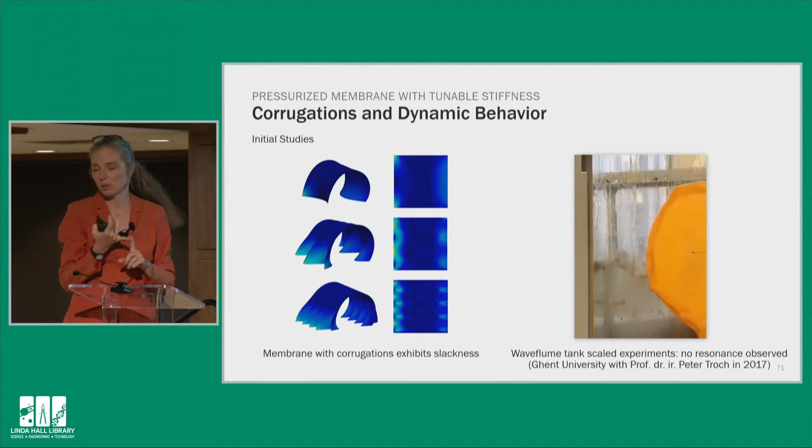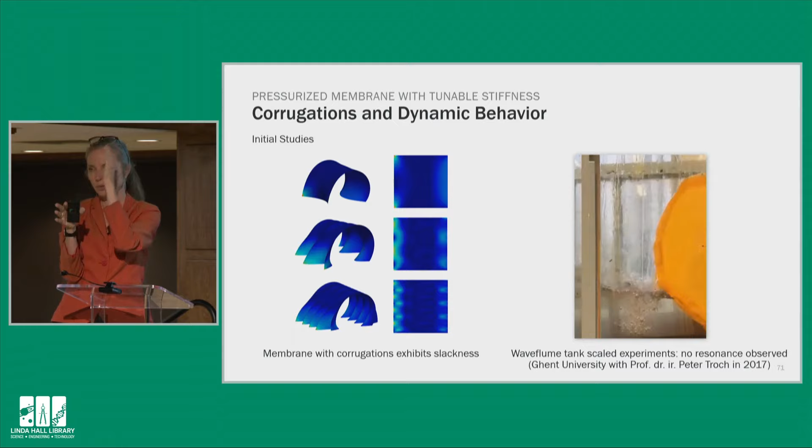What we found, when we carried out further analysis, is that these kind of barriers at that scale under that kind of loading will be strong enough, so the stresses within it are smaller than the strength of the material, with some factors of safety. The balloon will deform, which is fine, but the water will not overtop - it will move sideways but not so much that water goes over it. Also there will be no resonance, meaning the way the balloon wants to vibrate does not coincide with the resonance of the waves, because then we'd have that resonance problem again.

What you see on the right-hand side, I put that in because I think it's interesting. We did small-scale experiments in a wave flume tank. It's a crazy thing - a long aquarium, maybe 90 feet long, with a paddle at the end generating waves. You put your tiny storm surge barrier model at the end, and when the wave arrives you can take measurements of the pressures on it, and then scale that up to the larger system.

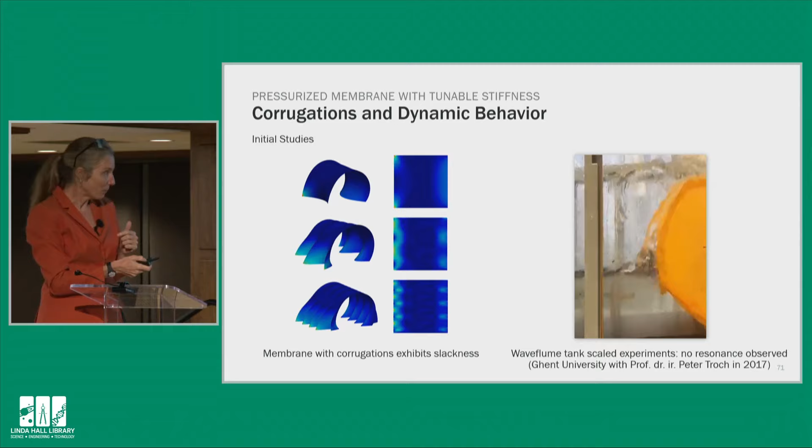So anyway, where are we going with that? One idea is to really shield off the coastline, or it could be around critical infrastructure, around hospitals.

Our idea is also, what if we can control the flow of water? What if these inflatables are in the water and are diverting the water to more sacrificial pieces of land? This is something they do in the Netherlands. There are lands designated that, if there's a big flood, those areas, usually fields, are going to be flooded. We accept that, but at least these big inflatables could direct the water toward the areas you want, rather than being completely surprised by where it's going. This would be useful for low-frequency large water events like storm surges and tsunamis.

So I've come to the end of my talk. I hope I've been able to show that in my research group, we try to harness the exceptional mechanics of these form-found structural surfaces for a future-oriented, resilient, and sustainable urban environment. In my group, we study the interaction between these slender surfaces and the environment. We draw inspiration from biology and history, but I also work with artists and crafts, because systems developed, for example, in weaving can be very useful for engineering applications. We develop numerical methods, machine learning methods, graphical methods, and analytical methods to generate knowledge.